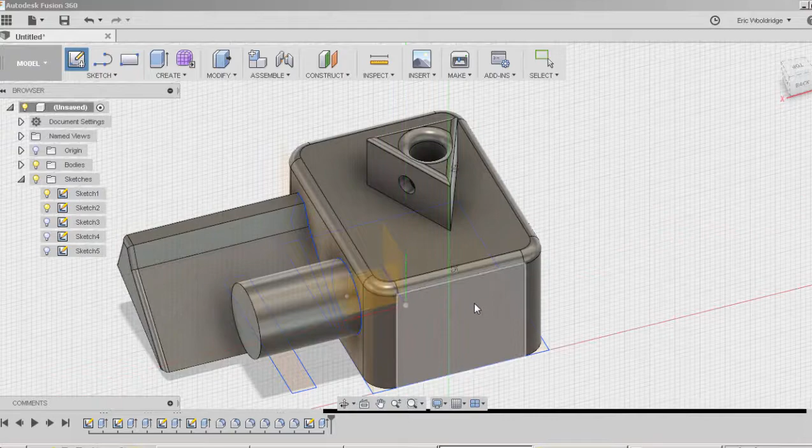I'm going to hit New Sketch, and I'm going to click on this edge right here of the parts, and I'm going to click down till I see text. Now this feature pops up with this A here, not a lot of information going on, but basically I click to establish where the text is going to start. You type in your text here. I typically like to start off with my initials, and you see a representation of the text. I don't really like where it is, so I'm going to kind of drag it down with a click.

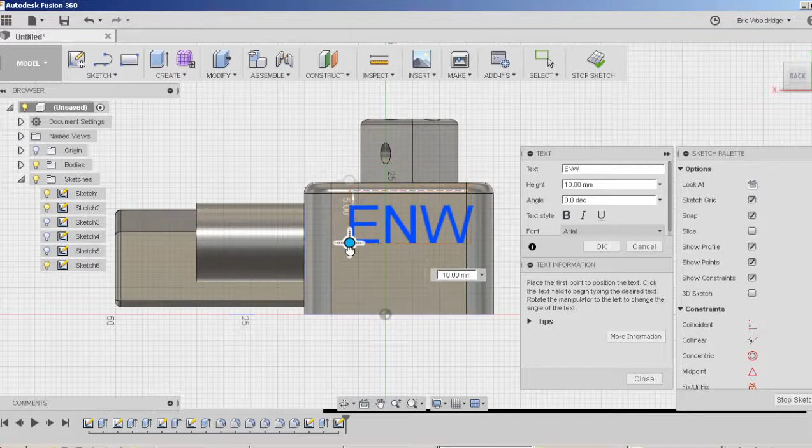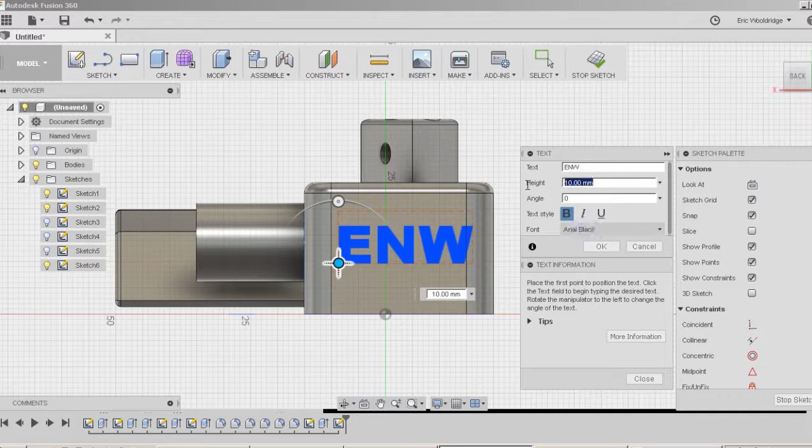And you also see there's some other options here. There's the text height. There's the angle of the text. I could set this at a funky angle if I wanted to. I don't really want to. I can make it bold. I could even change the font to a different font if I want to. See this little slider here? You can get a little bit more font options. Let's say Arial Black. It's nice and bold, a little bit too big now, so I'm going to take it back to 9 millimeters. And maybe I want to underline it. Maybe I don't. How about italics? Nope, don't like that either.

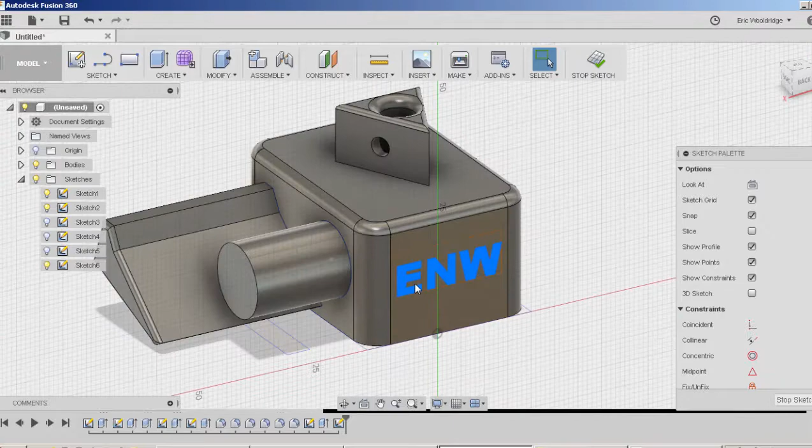Anyway, I've created a quick 2D sketch of my initials, 9 millimeters in height, that being roughly this way, in proportion, of course, and I hit OK. So now, there's the piece of text, but you'll notice it's still a 2D creation. And what do we do to 2D to make it 3D? We simply hit Create, get our cursor right over top of the text, click it, and we see the extrusion option. I'm going to type it in as 1 here, maybe actually 1.5, just because we know you can usually print that without having to have support material.

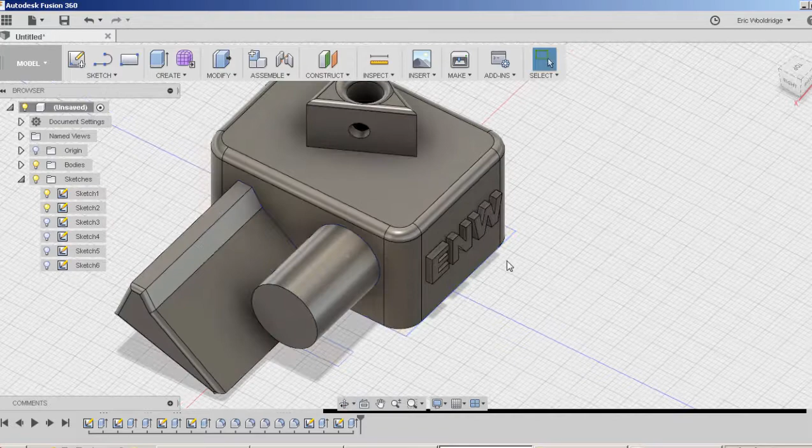And bam, I have now added my initials to establish that this is my part creation digitally and physically if I print it off. Here's what I want you to do. Pause the video and go do the exact same thing. Don't use my initials, of course. Use yours. But go check it out.

Alright. Now, assuming that you've done that, keep in mind what you can use text for. Text can be used to identify it's yours, or it could be a logo for a company. It could be instructions. One of the things that we're seeing folks use text for is to create placards and guides and jigs, so you can actually write out instructions. Let's say you're going to 3D print a warning sign. Well, that wouldn't be a big deal. You could actually just draw the rectangle as normal, or maybe some kind of sign shape.

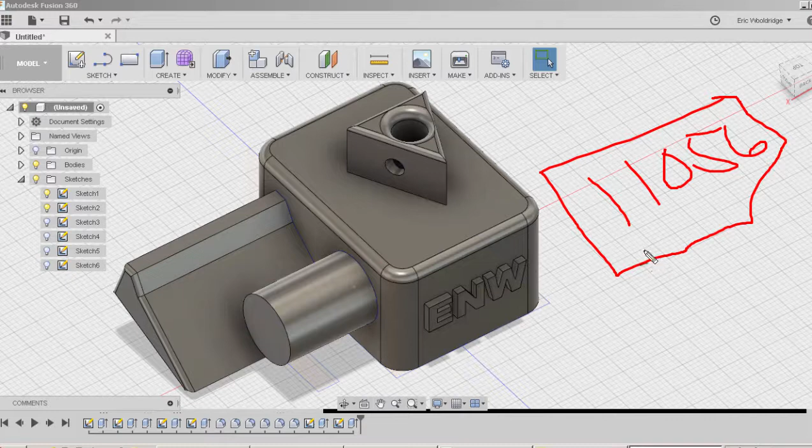Let's say you're going to 3D print mailbox numbers. You could actually design the part and then extrude out your address, whatever it happened to be, physically. Or you could say do not touch, in case you're making a logo or placard for an electrical device you don't want people to shock themselves with. We've actually done that a lot in the lab because we have so many wiring, parts, electronics. A lot of times we have to make our own warning signs and protection devices to keep people from potentially shocking themselves by grabbing exposed wires.

So you have a lot of capability with the text tool to take your creation and make it even more interesting. Now, conventionally speaking, if you were to cut this out, this would be very expensive. But with 3D printing, no problems at all. You can add text all over the place. So take advantage of this text command. Let the ideas just pop in and out of your head of what all you can do with this command. Great command, has a lot of features.

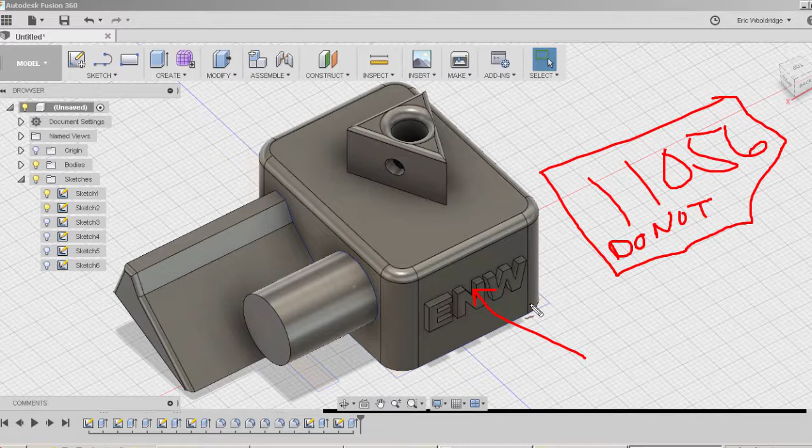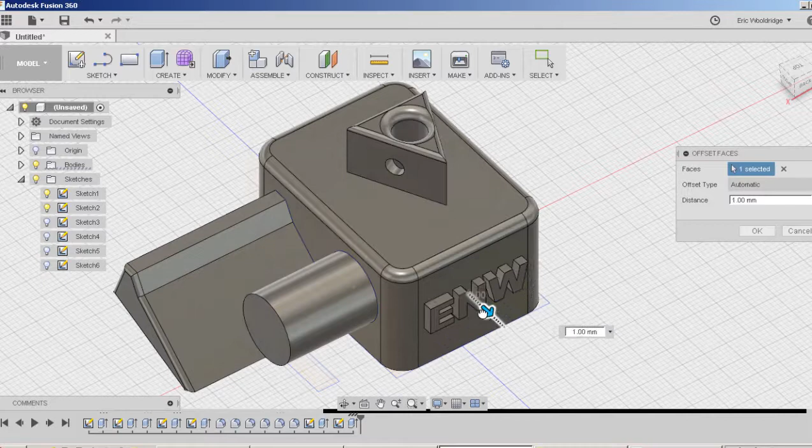You can always edit stuff. We can hit our modify here, get our text, and we can individually create our text, pulling it in and out, change our extrusion. Again, I set it to 1.5 for a reason, because if you actually print this part in the vertical direction that I have here, it would require support material. So we found that if you stick to extrusion of only 1.5, or at most, it can sometimes get 2, but 1 to 2 millimeters off the surface of whatever you're printing will typically go without having to have supports underneath. So keep that in mind.

Anyway, what I want you to do next is, assuming you did your initials, I want you to go create some other text around your object. Use some of the other sides, maybe a letter or two, maybe a question mark, maybe an exclamation point. It's only a matter of time before emojis become part of our text culture to actually embed as well. So whatever you want to create, go use your new sketch tool and some text to create it on your object. Make it your own. Pause the video and do that now.

Alright. Good start to some of the work. We'll check out another tool in a bit.